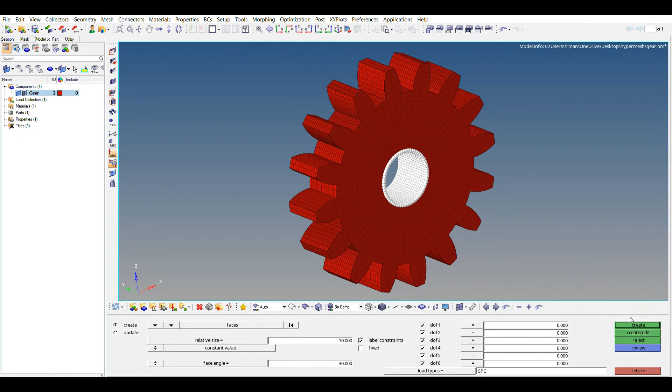and use faces here so that the software will detect each of the nodes on that face that we have just selected. Make sure all the degrees of freedom are checked and they don't have any magnitude, or else they have magnitude as 0. Load type must be SPC, not DAREA, and let's create. So now our object is constrained.

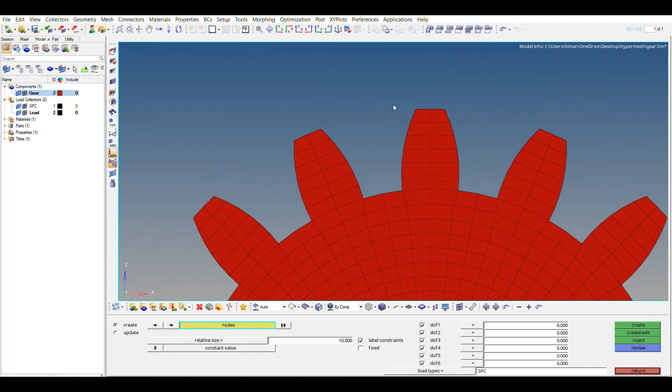Now let's define loading. Let's move back to load collector and define loading as, say, load. Create. Now from here, watch carefully. Let's go back to constraint and select nodes. Carefully select nodes. It has selected 17 nodes, the stream of nodes, and now in what direction you want to apply the force. So, yeah, we are using constraint to define loading.

So, make sure all the degrees of freedom are unchecked, and the only degree of freedom checked should be the one in which we are applying the load. So we are applying the load in x direction. So what is the degree of freedom for x direction? It is degree of freedom 1 for the translation x. So let's check the degree of freedom 1 and define the magnitude of load. So let's say it's 10.

Now the load type, remember to change the load type to DAREA. So DAREA is the type of load which lets you define the time dependent load. So make sure you keep that in mind, and let's create. Yeah, the software has defined it. Now we have defined constraint, we have defined loading.

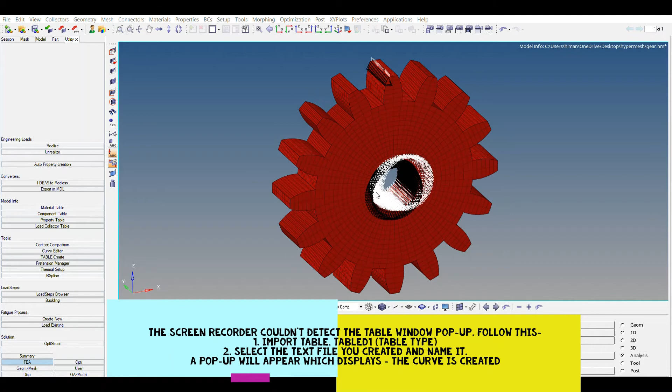Now that we have loading, and now we have the time versus load scale factor table, the next step is to combine them. So how could you combine them? By using the TLOAD card image. So the load collector is tload, and set the card image to TLOAD. It will be on the next page, TLOAD1. You could use TLOAD1 and then create it.

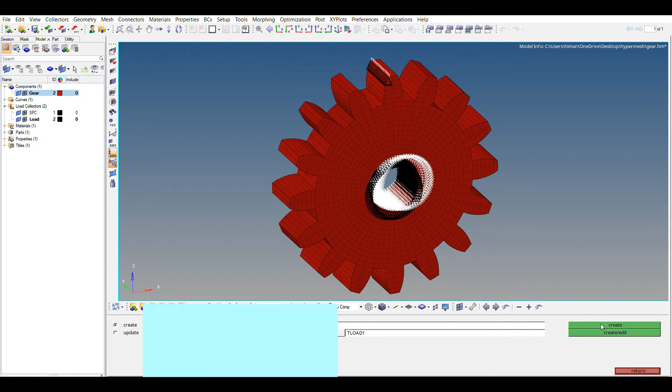So in the EXCITEID, select the time dependent loading, and in TID, that is table, select the table that we have just created and then return. So now our condition is all defined.

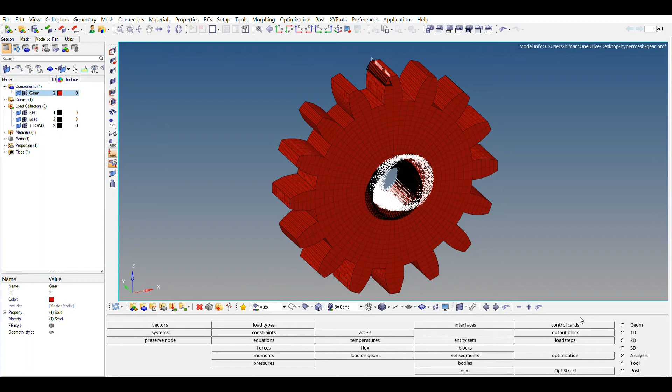Now what we have to assign is the damping factor value of G. So for that, go to control cards and go to next, select PARAM card image, and scroll until you find G. So yeah, it's G here. Give the value of damping factor as 0.2.

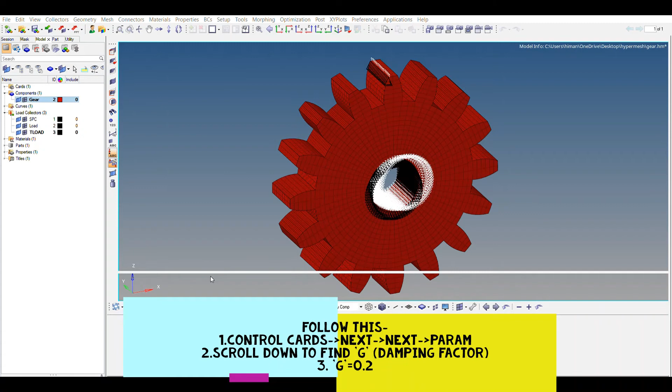So we define damping because our structure is going to absorb some shocks or some movement. That is the reason we have defined damping. It is not going to resonate with the external cyclic frequency. It is going to absorb some. So that is the reason we have defined the damping factor.

Let's define TSTEP. Now what is TSTEP? The TSTEP card image will tell the software how long our analysis is going to perform, for how many seconds. So for load collector, card image as TSTEP, and then create it. Define the number of steps as 1000, and dt is 0.5. Let's set this as 0.5. Return.

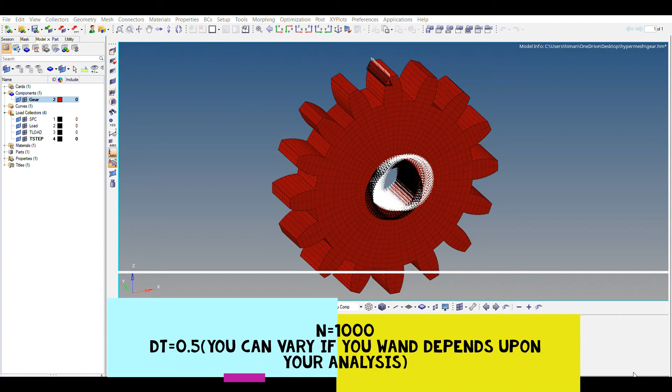Now one last thing that you have to do is define the global output request, to request the displacement and stress. So for that, go to control cards and go to next, and then select global output request. Now request here the displacement, make sure the format is h3d, and just scroll right and select the option for yes, set to all, already set to all, so that we get the analysis done for all the mesh.

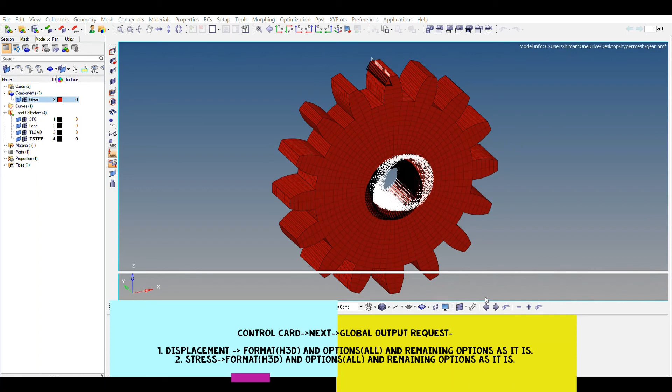And also stress, same for stress, option, yes, set to all. Now return.

So now at the end, let's define the load steps. Go to load step panel and select the type as transient direct. Make sure it is transient direct. Name it as tran and select SPC as SPC, DLOAD as TLOAD, and TSTEP as TSTEP. So these three conditions you have to define and then create.

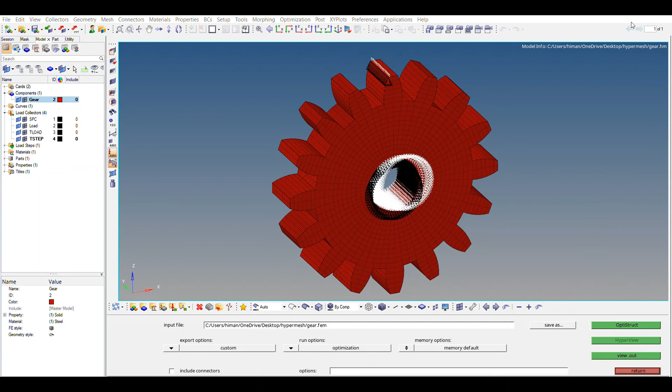Return. And now we just need to save the file and solve the file. Save and OptiStruct. So it is going to take some time. So the solver has done solving the part. Now let's look at the result. First we'll be looking at displacement.

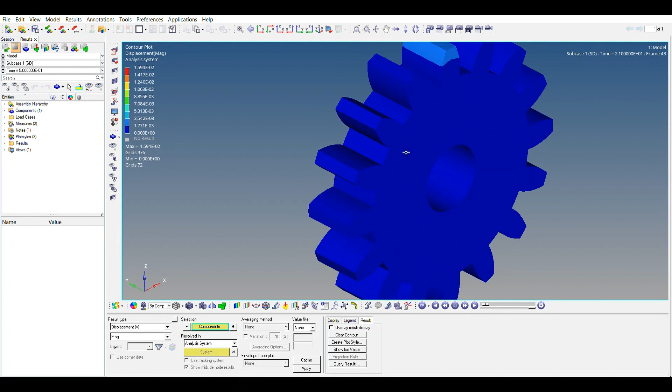So as you can see, the value of displacement is 0 here because the time is set to 0. If we increase the time, the values will be increased correspondingly. So the way I like looking at it is setting up the animation. For that you go to the set linear animation mode and start animation. It will perform some iteration before presenting the animation. So this will give you a clear understanding.

If you want to see the value of displacement at any particular time, then you can do it by setting the time here, and at that time you will be getting the value of stress or displacement or corresponding values.

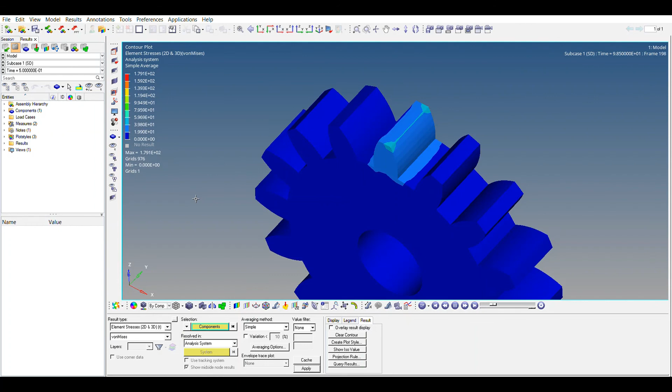Now let's see the element stresses. Averaging method is simple and apply. So it is performing some iteration before presenting the result. So yeah, the value of stress at the very edge is quite high because of having less cross section area there. So yeah, we are done with our transient response analysis.